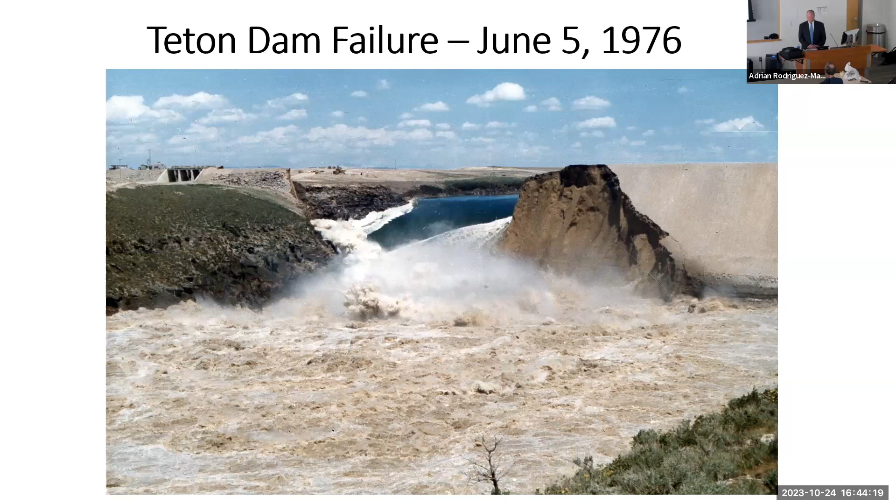I was asked in October '78, 45 years ago, by Rich Kramer, who was running the Embankment Dams Group at the time: 'We're opening up the dam safety office. Dave, we need some help. Would you take some time and volunteer and help?' And I said, sure, and I did so.

So I've been immersed with dam safety, dam engineering, and construction my entire career. It's fundamentally rooted in the Teton Dam failure.

I had the great fortune to be blessed with many engagements with Dr. Peck over my career. He served on several consulting boards for dams that I designed and constructed. This is his quote with respect to the failure at Teton. Frankly, if you have interest in the dam and levee world, I submit reading those proceedings from that investigation should be required reading. I'm sure you can find it online.

Again, I had good fortune to be involved, to talk to Dr. Peck and others who were involved with the failure. The state of the profession at that time truly should have dealt with the geologic conditions that presented themselves at Teton. There was truly a situation where the organization failed, quite frankly.

So before Teton, there was actually Fontenelle Dam on the Green River in Wyoming, western Wyoming. It's an earth dam, about 130 feet tall, 5,000 foot crest length, built in the 60s.

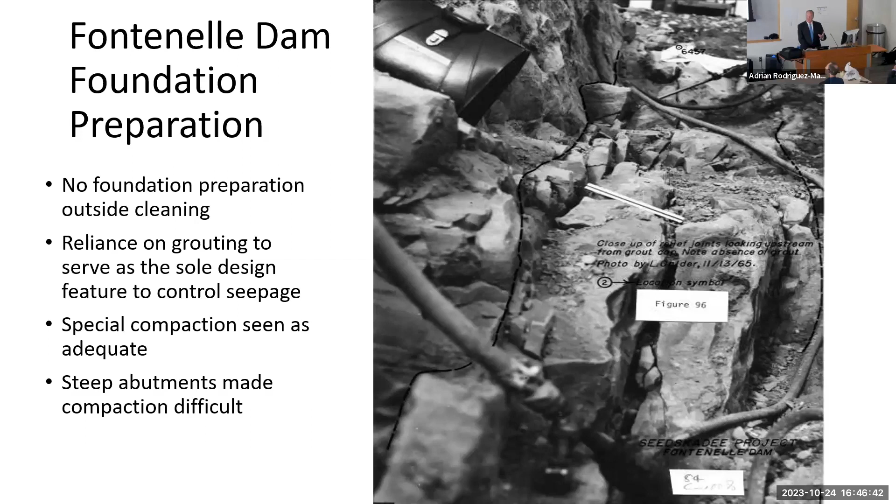So this is a picture of the foundation. There were vertical, open joints—very problematic geologic conditions upon which to build an embankment dam. You can see some of the open joints in the design. There was generally not a rigorous cleanup or treatment program, and the single line of defense to mitigate foundation seepage was foundation grouting. A fairly conservative section in terms of the impervious core, constructed out of silt and gravelly silt, similar to Teton.

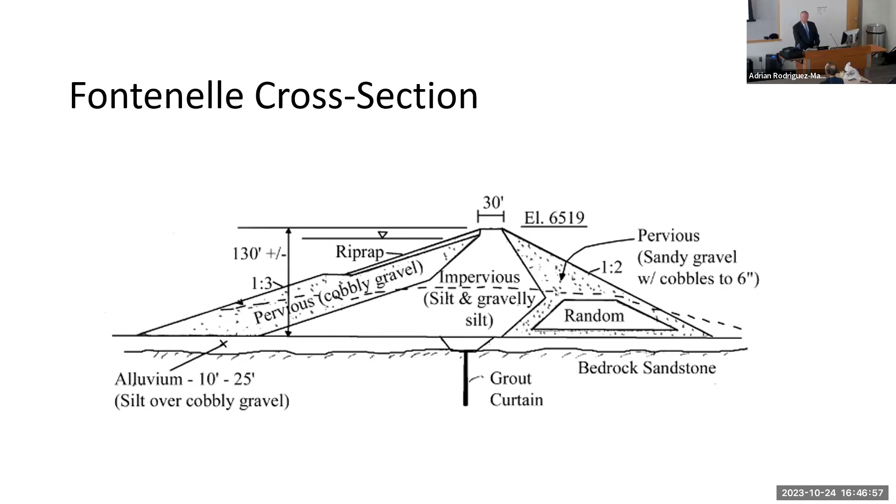But what really caused the incident or the concern is this: in May of '65, the spillway, constructed over on the right abutment, at the spillway embankment contact—again, some of the irregularities and open joints in the foundation—seepage migrated through, created erosion, and there was a near failure here. They were able to open the gates, lower the reservoir, and establish a safe condition.

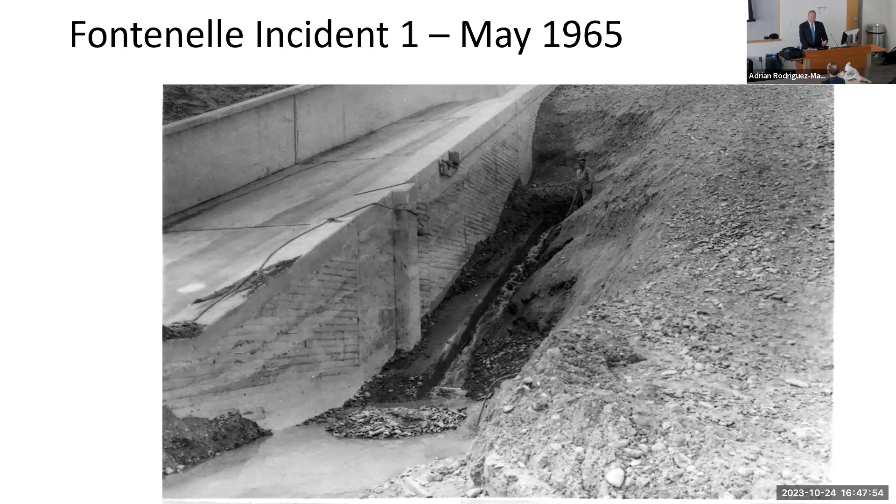They then excavated this, backfilled it, reconstructed, refilled the reservoir, and lo and behold, in July, a second event happened. You can see the extent of it in the same general area.

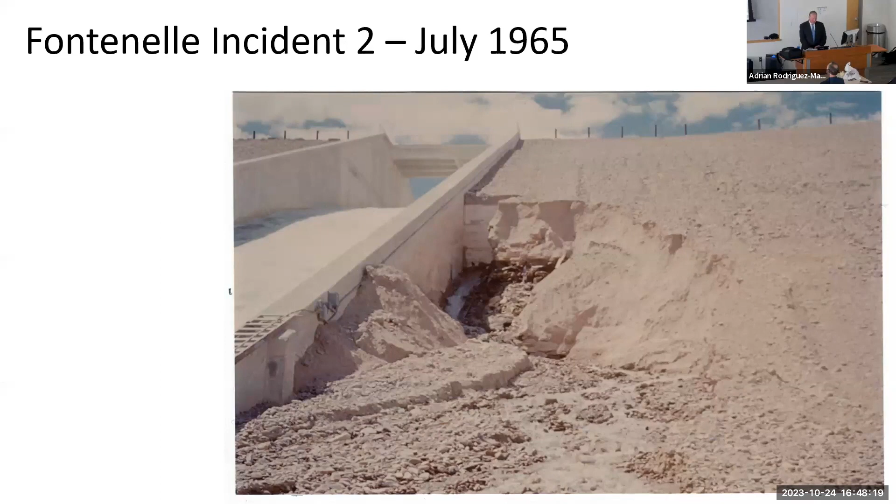So again, just a few months later, the same event happened again—emergency evacuation, lowered the pool, excavated this out, and rebuilt it, reestablished the reservoir pool. And lo and behold, a third incident occurred in September of '65, much larger in extent.

When I see these pictures, I am constantly amazed that the crest didn't fall in and the dam breach, causing release of the reservoir. Just a miracle that it didn't happen. So they excavated and rebuilt this section and reestablished the reservoir.

So I point this out in that if you work for large organizations, you shouldn't be complacent—you should guard against being complacent. The Bureau of Reclamation had built Hoover Dam, Glen Canyon, Grand Coulee Dam. So there was, in all honesty, some arrogance within the organization, having all of those grand dams in their portfolio, operating successfully around the West.

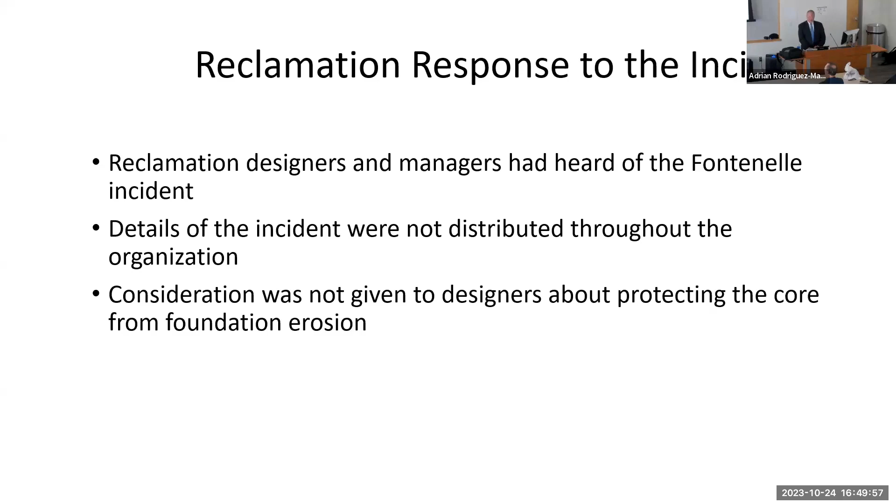In response to this incident, reclamation designers and managers heard about Fontenelle, but in talking to engineers working in that era, there was not widespread discussion, presentation, or conversation about its cause and extent. So this is truly before a formal dam safety program was designed and implemented.

So moving on—from Teton, 11 lives were lost. The dam essentially topped out and failed upon first filling. Again, the state of the profession, in all honesty, if you go back to that era, was mature and certainly had the experience and wherewithal to treat a difficult foundation. This was volcanic basalt, lots of open joints, but again, the organization did not really heed the state of the practice, and lo and behold, the dam failed on first fill.

So again, some of the lessons learned: the principal designer for the dam in Denver visited the site one time during construction. One time. There was essentially little to no coordination or communication between the construction team building the dam and the design team that designed it in the Denver office.

There was no external review, no consultant boards at that time. And again, the primary defense against seepage through foundation defects, which were significant at this site, was essentially relying on a single line grout curtain.

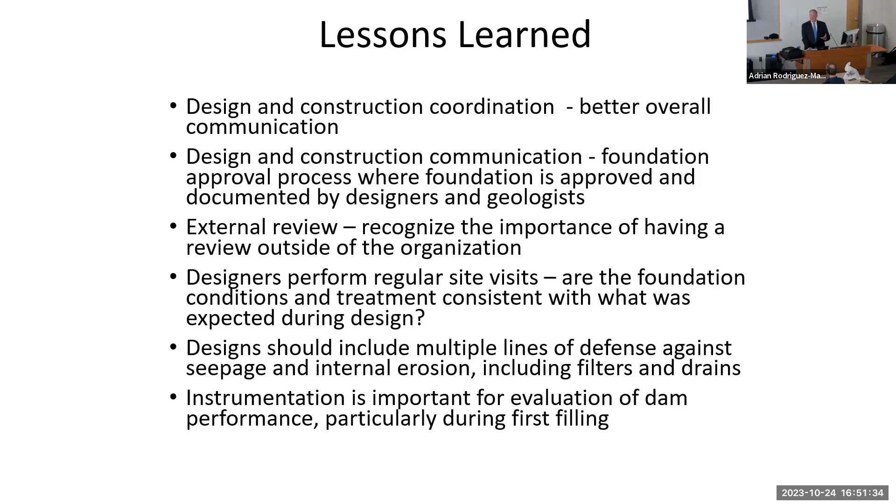So moving on to the history as it relates to dams as a significant piece of our infrastructure in this country—where there's dams, there's dam failures. So I'll talk here in a minute about the NID, the National Inventory of Dams.

So in the United States of America, there are 90,500 dams in the NID, which I continue to find an astounding number of dams that have been built and are registered in the NID, administered by the Corps of Engineers. You can see with the NID, the federal government—Corps of Engineers, Bureau of Reclamation, TVA—has been able to keep track of failures or incidents which have generated these statistics.

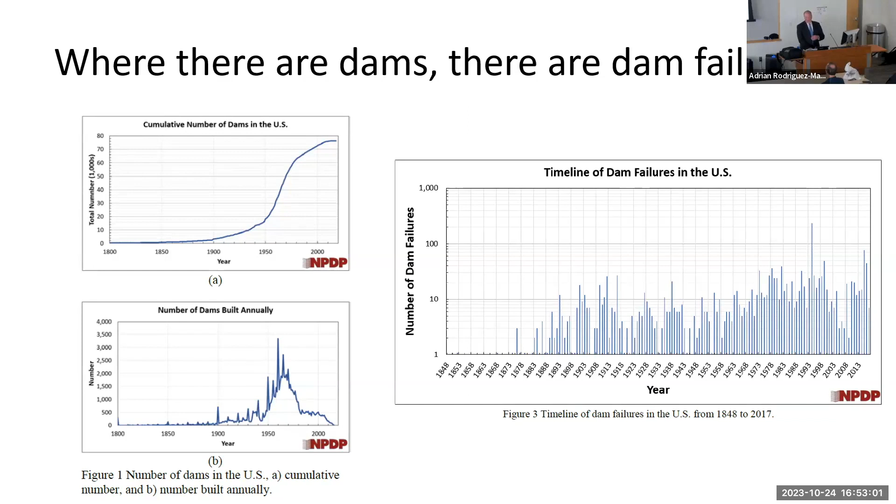So there's low probability, but nonetheless, when you impound water and create a lot of potential energy, if you don't treat the foundation or design it properly, you certainly can have a breach and release a lot of energy.

I apologize, I know this is a bit of a hard slide to digest, but it's a timeline, and the intent here is to document some significant failures in the United States. There's Baldwin Hills, Fort Peck Dam Slide, Teton, Lower San Fernando. So in our last 50 to 70 years, there have been some very significant dam incidents or failures that have actually caused the reservoir to be released and caused significant damages and loss of life downstream.

Certainly the Teton Dam failure in 1976 generated the impetus within Congress and the federal agencies to generate legislation and create a national dam safety program.

Another slide depicting this. So ironically, at this time, the Corps, the Bureau, and TVA in the federal world were self-regulated dam owners, with their own portfolio of dams. The Corps has 715, TVA has around 200, and the Bureau has around 400 dams. When you sum those numbers and compare them to 90,500, you can appreciate that it's maybe not a high percentage, but nonetheless those agencies have some very high and very significant dams.

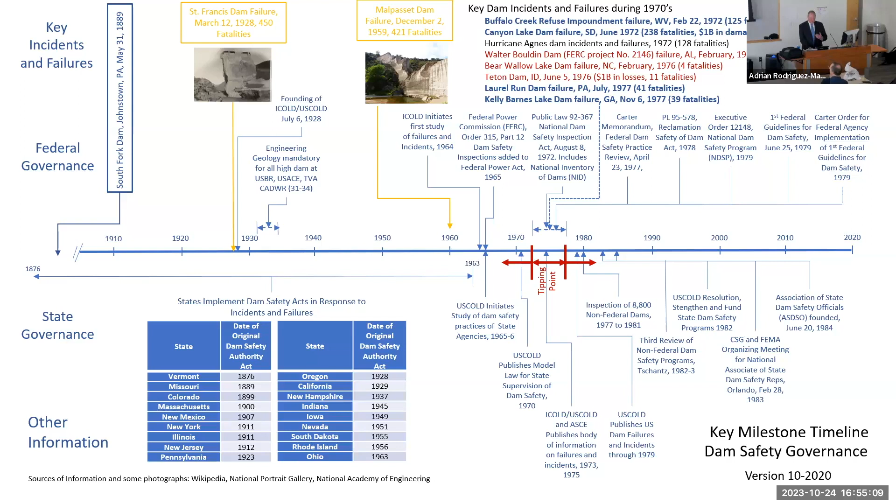So again, the turning point for the dam safety program in the United States was certainly Teton, the impetus in '76. As a result, the Dam Safety Act was developed and passed.

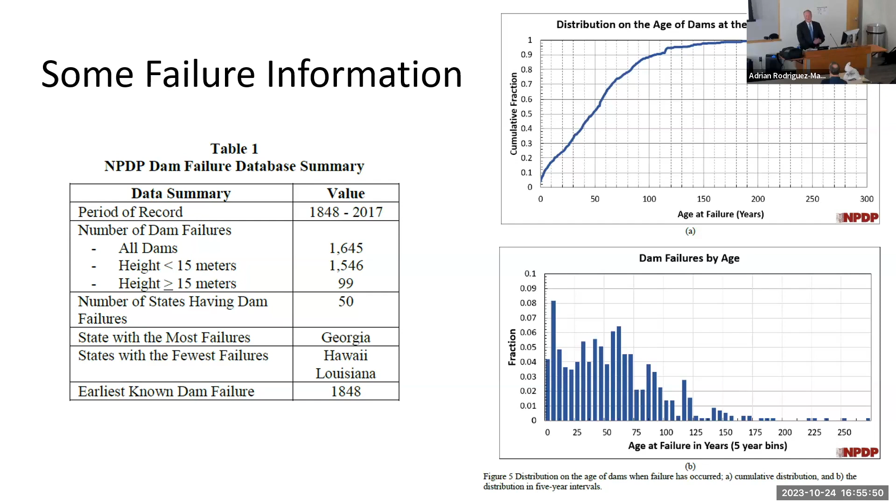So some other failure information to give you context. This record is from 1848 to 2017. You can see the number of dam failures is over 1,500. All 50 states had a dam that failed. The state with the most is Georgia. Those states with the fewest were Hawaii and Louisiana. Having this sort of statistical information is quite important in terms of developing dam safety programs.

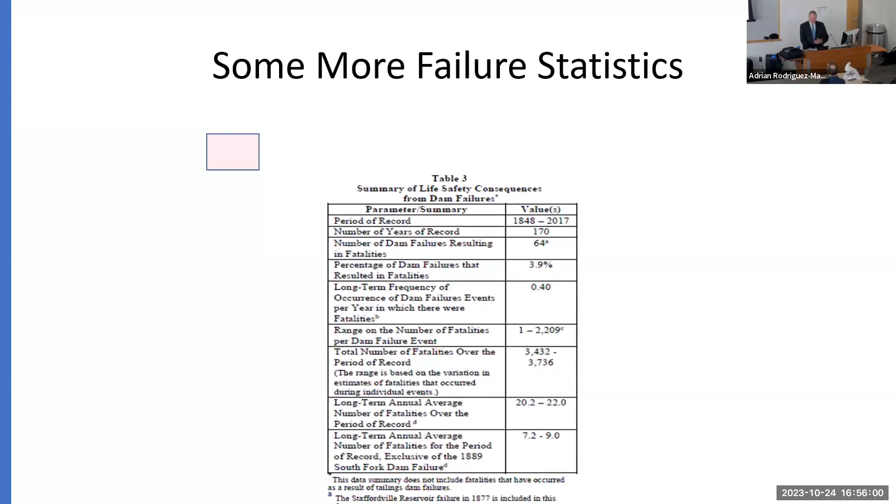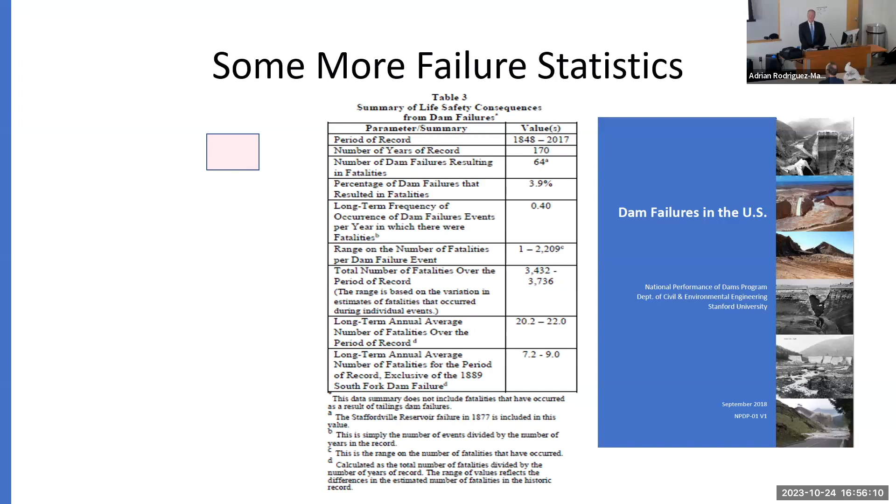Some other statistics came out from Stanford University in 2018, represented in this report. I'd certainly encourage you to reach out and access that information.

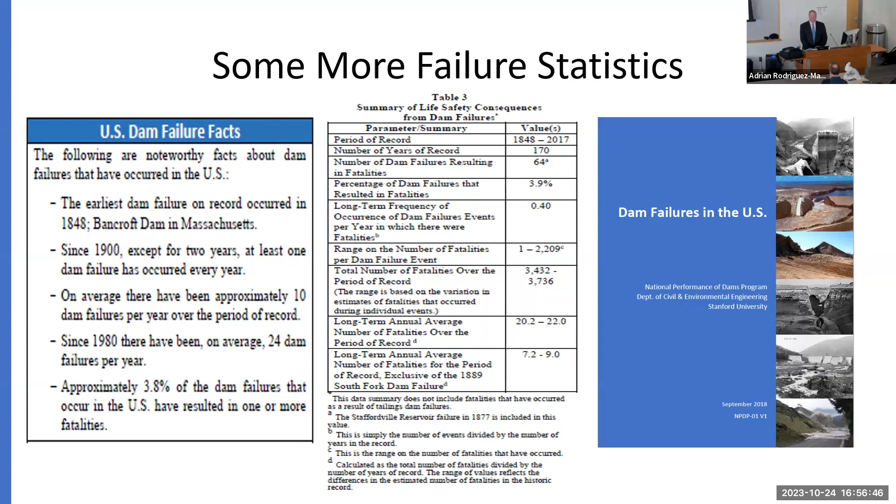A statistic I find astounding is that since 1980, so in the last 43 years, there's been essentially 24 dam incidents per year. That doesn't mean failure, but there have been slides or stability issues that cause some sort of emergency action. So it's essentially 2 a month for the last 43 years, which again I find rather astounding.

So as I said, the National Inventory of Dams was created, mandated by Congress as part of the dam safety legislation. This is the URL for that. The Corps maintains this database, and it interacts with each of the 50 states. Each of the 50 states now has a legislated active dam safety program. Alabama was the last - last year, or maybe the year before, they finally passed legislation and funded and started a dam safety program. That conglomeration of all 50 states resides under the Association of State Dam Safety Officials, ASDSO.

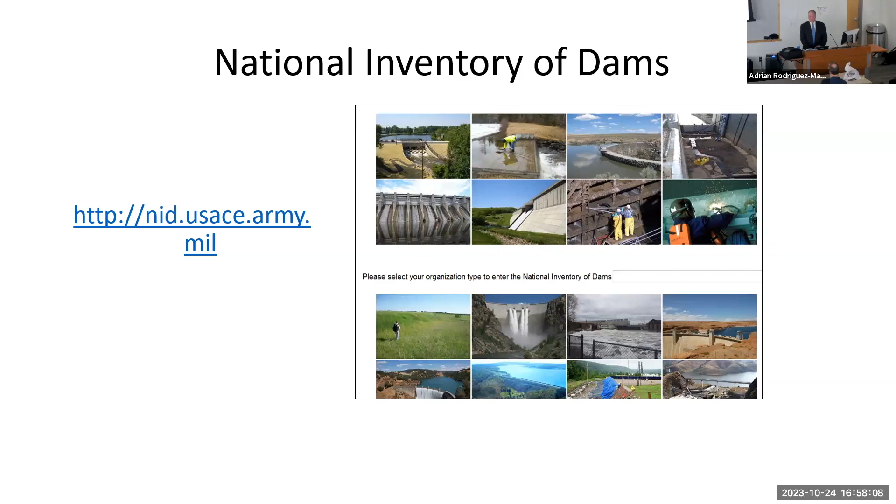The other organization primarily focused on dams in the U.S. is the United States Society on Dams, USSD, which is affiliated with ICOLD, the International Commission on Large Dams. Both USSD and ASDSO meet annually. As Alan mentioned, as you move into practice or proceed in your career, you should certainly reach out and engage with those organizations.

So some statistics from NID. It's used by the National Dam Safety Review Board and Association of State Dam Safety Officials to inform legislatures in their states, to inform Congress and federal agencies, and to recommend dam safety policies. Many of those changes reside in WRDA legislation, the Water Resources Development Act. They're not passed every year, but every couple of years WRDA passes through Congress, changing policies or adding new ones.

So more than 65% of the dams in the NID are classified as low hazard. 50% of them are less than 25 feet in height. And almost 70% of the dams are privately owned. The privately owned dams are regulated by the state dam safety programs. The average age of the dams is 60 plus years.

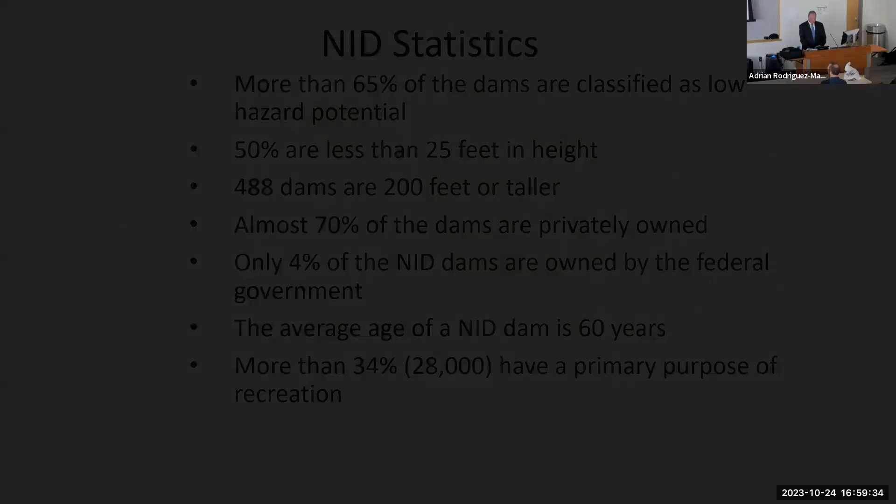They designed and are responsible for 15,000 miles of levees, about 10% of the total. Those of you who grew up or lived around major rivers like the Mississippi, Missouri, or Ohio can probably remember significant flood hydrologic events in your lifetime that caused flooding.

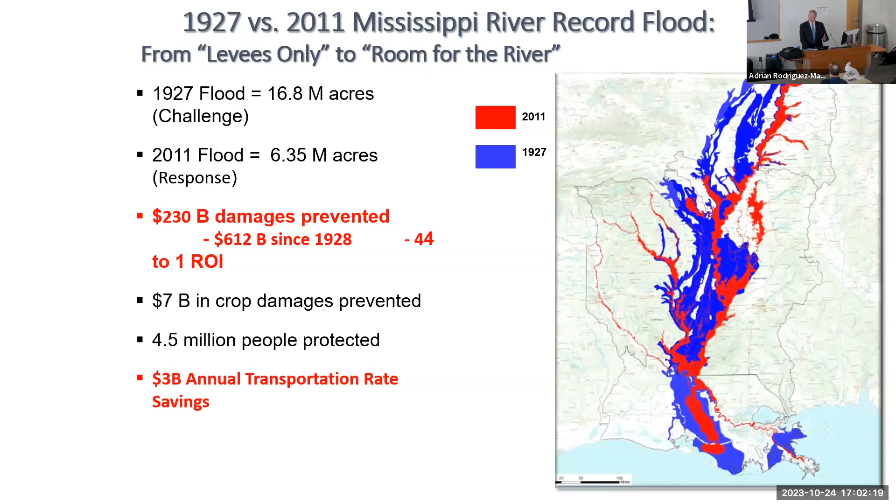You can see between '27 and 2011 there were almost 17 million acres affected by flooding in '27, and somewhere over 6 million acres in the 2011 floods. The amount of damages that were mitigated or eliminated by the levees is again very significant.

Congress passed the National Levee Safety Act in 2007, as part of WRRDA legislation in 2014. The Corps of Engineers is taking the lead to implement the National Levee Safety Program. Again, the Corps is responsible for 15,000 miles of levees, and they are working with each of the 50 states. The goal is to bolt a levee safety program onto the existing dam safety programs within the states.

So similar to the NID, the Corps has created the National Levee Database. In the last decade, they have been able to assess and populate the levee database for the 15,000 miles of levees in the country that the Corps is responsible for. They're working with states and other private owners to assess their systems and get that information into the database.

As I know you can appreciate, having this sort of historical information is the foundation for any safety program, and it's quite important as organizations continue to assess the performance of their structures and make decisions as to whether they're safe or unsafe, and if unsafe, what actions are required to bring them to acceptable levels of failure, as I'll get into in a minute.

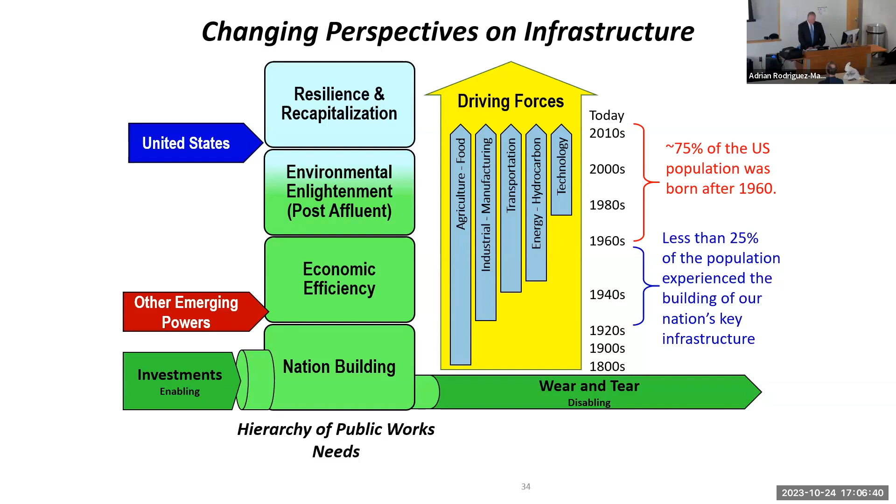So again, I find those kinds of statistics rather fascinating, but again, try to give credit to the previous generations.

Transitioning from the traditional view of infrastructure safety, it was generally fundamental engineering: strength of materials, geologic characterization, laboratory testing to identify engineering properties of materials, and from there utilizing existing materials to design dams or levees and construct them with stable slopes such that they could handle the hydrologic and seismic loads without failure.

And these were, and still are, standards based. So you're certainly experiencing all of those factors, all of those areas as you continue and progress through your education.

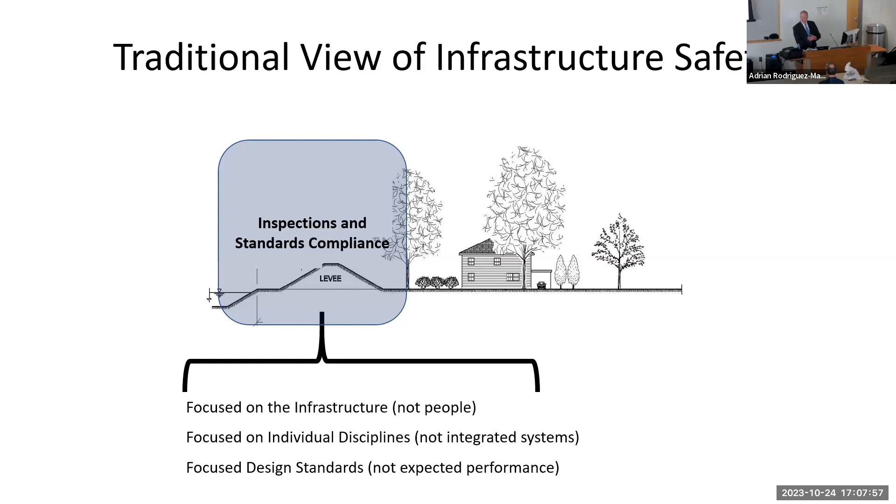In the last 30 years, at least in the federal world, and it's slowly transitioning from federal to states and other private owners, we're transitioning to a risk-informed view of the infrastructure. In that context, you'll hear the word risk in just about every sentence. Fundamentally, it's a function of the hazard, the loading, response to that loading, and evaluating the consequences.

In the early days of dam safety, when I was working at the Bureau of Rec, I think we did a good job of evaluating the potential failure modes. We might not have used that particular term, but we certainly identified the geologic conditions, evaluated strengths of materials, and decided whether we needed a cutoff wall or whether we needed to grout the foundation or do some other special means of foundation treatment.

And we stood on the crest of the dam and said, well, there's a lot of people down there. But we didn't really exert the analysis to categorize and assimilate that information as part of our decision making. It was not really a formal part of that.

As we transferred into this risk-informed decision-making process, which is the guiding principle for our safety programs, we spend a lot of time and rigor to evaluate the loading conditions, assess how the dam or levee would perform under those loading conditions, and we've put a lot more rigor in assessing the potential consequences.

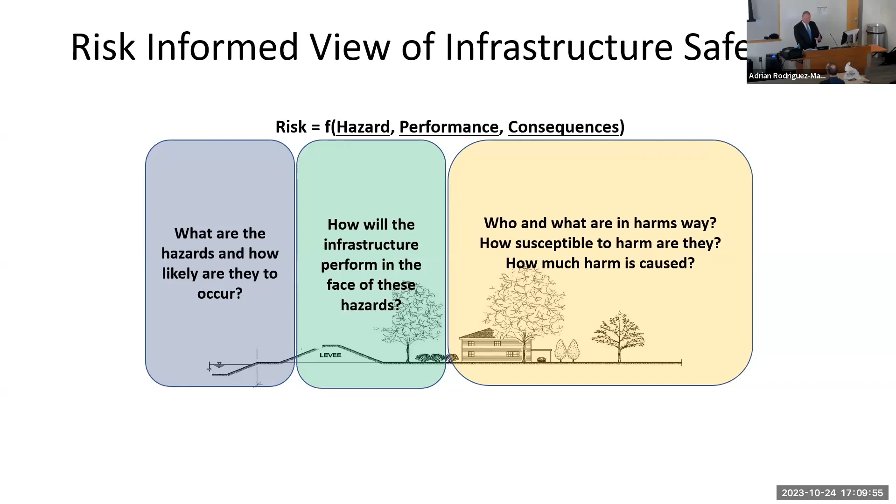It has been well served in coordinating within the federal community and community of dam owners, but it's also been very powerful in communicating with our legislatures in each state as well as Congress in terms of defining the condition of our infrastructure. As I said, average age of dams is 60 plus years.

There's over 600,000 bridges in the United States, 150,000 miles of levees, untold numbers of roads and pavement and that sort of thing. So the extent of our infrastructure that we all benefit from is truly amazing when you consider most of it's been built in the last 100 years of our country.

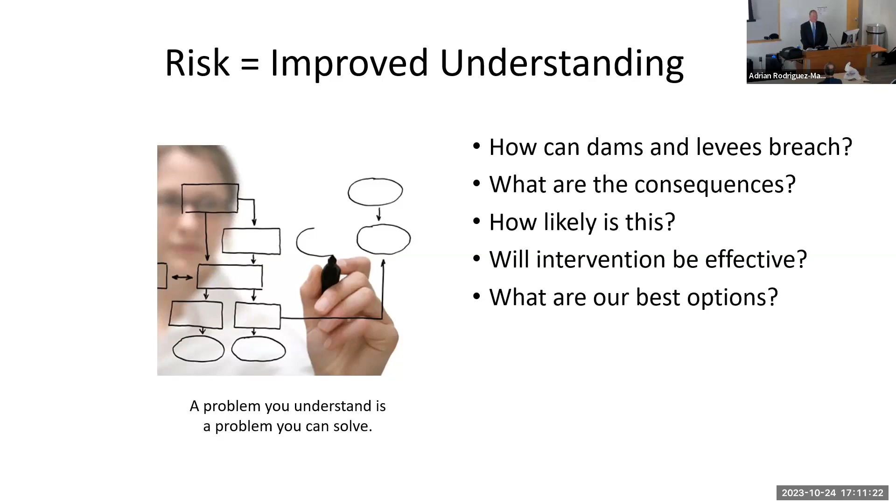Being able to articulate to the legislatures and to Congress about our needs as agencies like the Corps, the Bureau, TVA—we have this infrastructure, it's in this condition, we need these kinds of monies appropriated so that we can go forth and execute modifications or repairs to these structures to maintain their serviceability.

Since the 80s, dam construction has slowed with the implementation of environmental regulations. It's certainly more challenging to move forward and modify structures given those regulations.

I've had the great fortune of working on the last two major dams built in the United States: Ridges Basin Dam for the Bureau outside of Durango, Colorado, and the Corps-constructed Portuguese Dam, an RCC dam outside of Ponce, Puerto Rico. I've been blessed to work on a significant number of dams around the country and around the world, and I've also been able to modify and work on several.

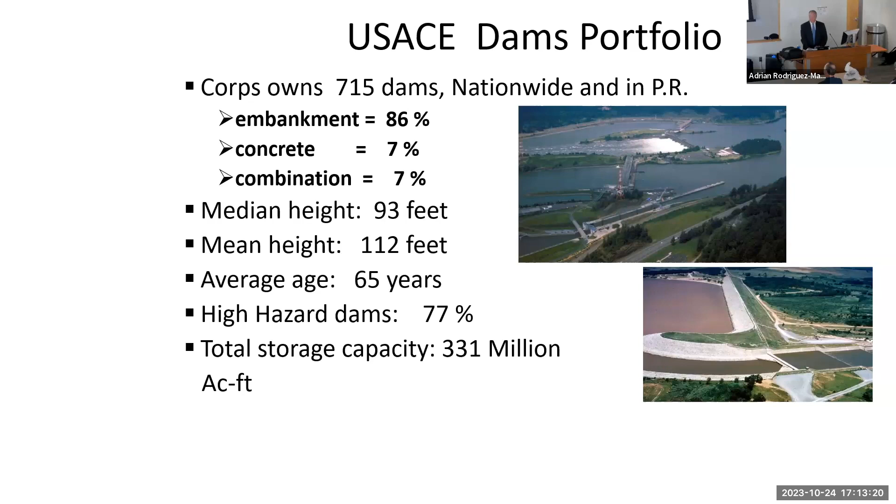Having ended my career with the Corps, I have quite a few statistics primarily focused on the Corps. The Corps' portfolio has 715 dams, and almost 90%, 86%, are embankment dams. The median height is around 93 feet, and the average age is 65 years or so.

Over the last decade, as the Corps transitioned to risk-informed decision-making, they have assessed each of their structures. You'll see this chart—this is an FN chart. The axis is annual probability of failure versus life loss. So dots that plot above the line are pieces of infrastructure—dams, levees, locks—that have high risk.

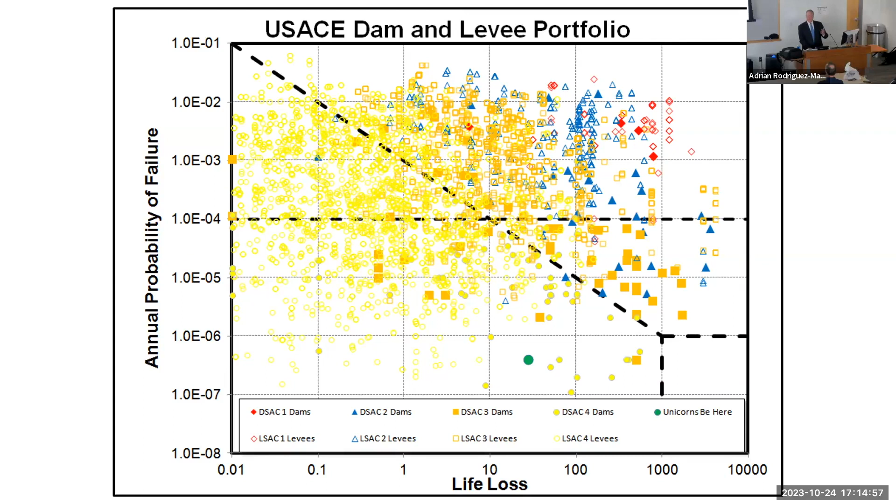They've been assessed. Failure modes have been developed and evaluated and judged by a multidisciplinary engineering team that the dam needs to be modified or the levee needs to be modified to obtain or maintain safe operation. Almost half of the 3,000 pieces of infrastructure that the Corps maintains and operates on behalf of the country is judged to be high risk and needs to be modified.

In addition to dams and levees, the Corps operates about 240 lock structures on the major river systems in the country.

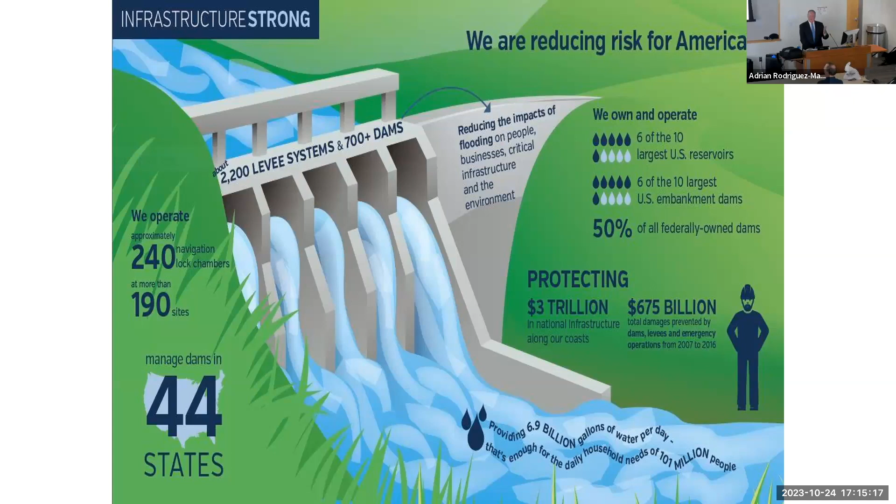And again, representing a value of $3 trillion. So again, a tremendous portfolio of infrastructure.

As the Corps has transitioned, they would tell you that it's not necessarily that the structure is 65 years old. It's because the major risk drivers identified are defects or flaws in the design, and the state of practice and material technologies have changed. Concrete is air-entrained now with many additives, so the durability of concrete is much better than it was back in the 20s or 30s.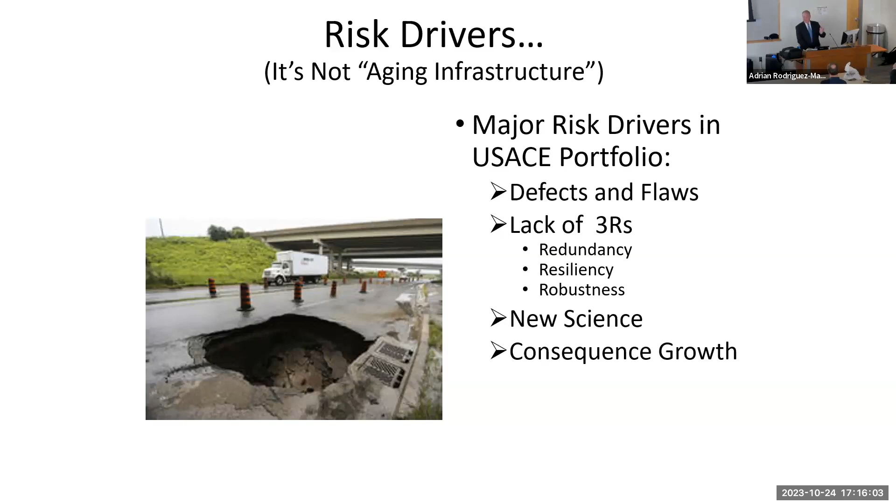But as you can appreciate, the country's population has increased dramatically in the last 100 years. Last census, we're somewhere around 330 million people in this country. So the amount of consequences, the property and development, houses, people living behind dams or levees has grown exponentially, thereby creating the risk.

So fundamentally, risk-informed methodology allows organizations such as the Bureau or the Corps to be able to rack and stack. If you own 3,000 pieces of infrastructure, how do you decide what to work on first? Risk has been very powerful in being able to assimilate and evaluate the portfolio of infrastructure and decide this is number one priority and this is number 3,000 priority.

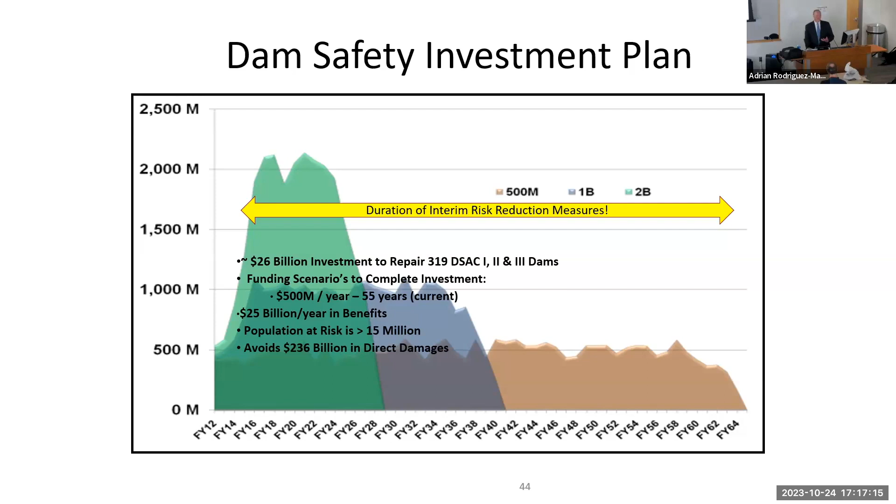And then again, it's very powerful in working and coordinating with legislatures and Congress to be able to tell that story in a compelling and persuasive manner, such that you can solicit and obtain the funding so you can go forth and maintain these structures.

So again, the Corps has spent a considerable amount of effort, money, and labor hours to develop databases and be able to continue to track the condition of the infrastructure. As I said, having these sorts of statistics and this sort of information, we've been able to tell a very powerful and compelling message to the legislature.

So you're able to tell where the source of risk is, and then through engineering, you're able to identify those engineering solutions that you're asking money for to go forth.

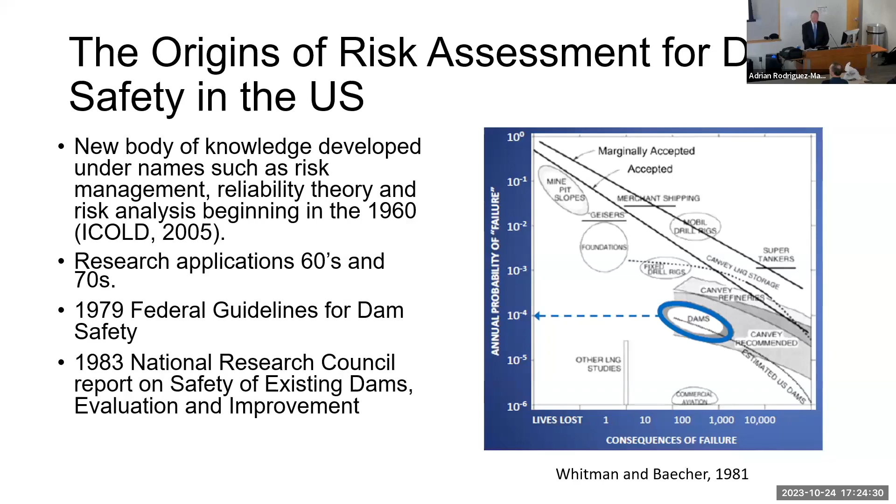In 1979, federal guidelines and the 1983 Research Council was the pioneering aspect for the federal agencies. In the Dam Safety Act of '78, '79, there was specific language written that focused the agencies to start thinking in terms of risk and failure modes. A lot of this has its root in the space world, NASA.

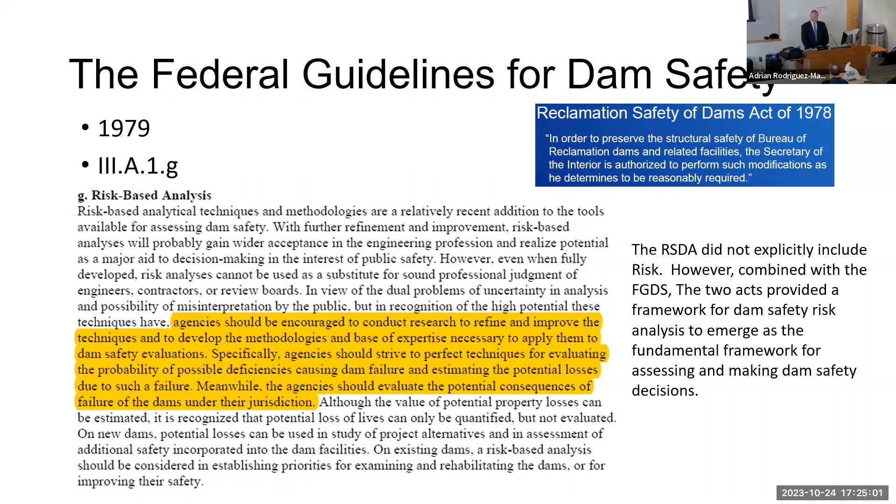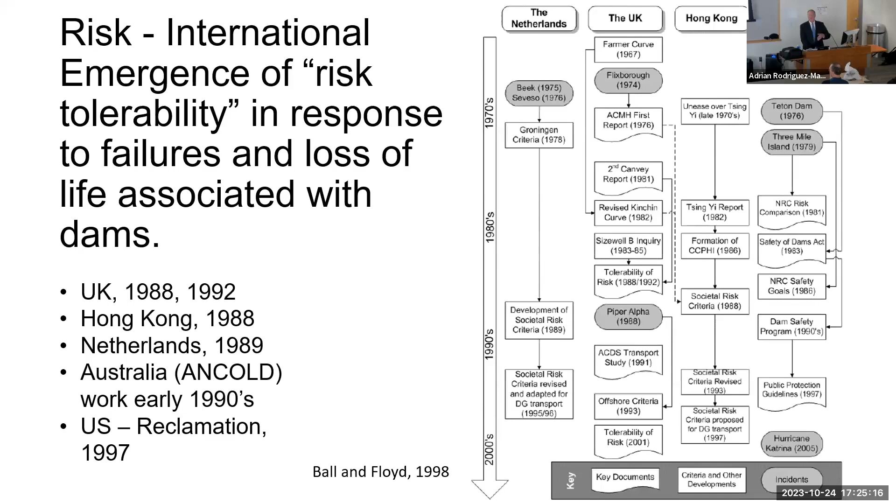As you can see, other countries - in Britain, Hong Kong, and particularly in Australia - also began developing the methodologies and processes that we continue to utilize. In the late 70s, transitioning through the 80s and 90s, Reclamation probably led other federal agencies in developing risk-informed decision-making.

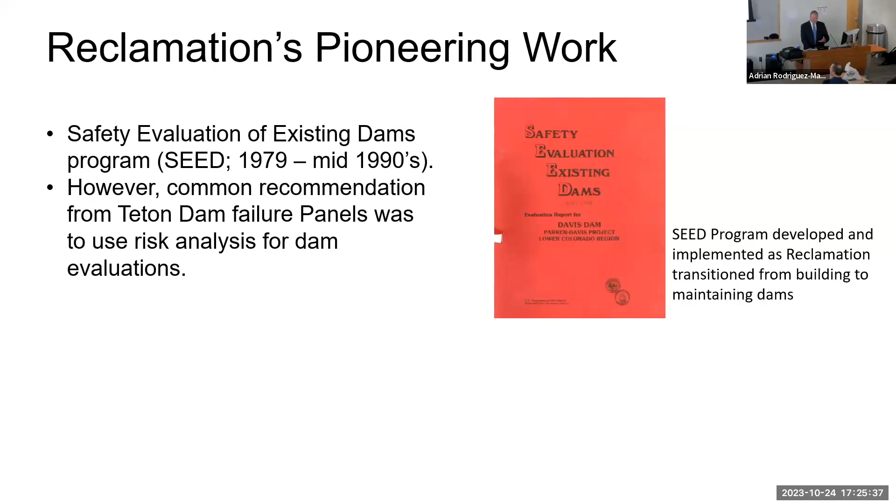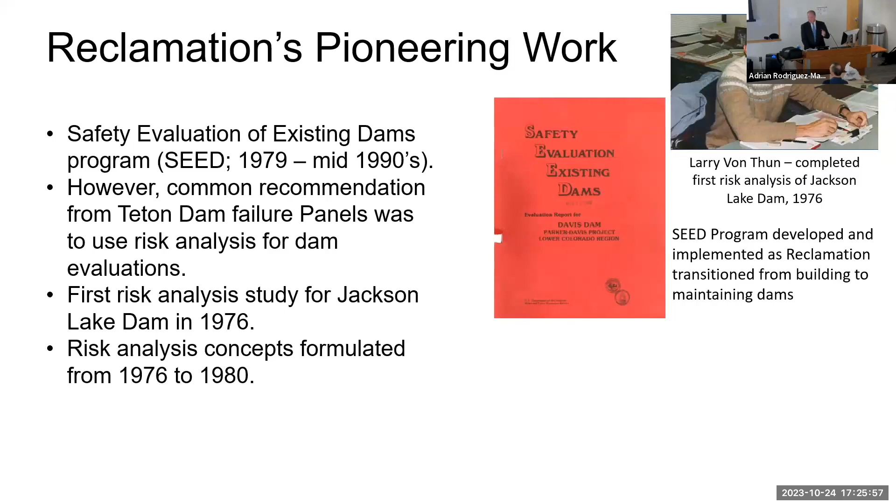The first study was done for Jackson Lake Dam in 1976 and was led by Larry Von Thun, who really pioneered the development of risk analysis along with Dr. John Smart at the Bureau. A team was formed and they developed the first guidelines, if you will. Larry worked with the Canadian hydros, BC Hydro in particular, and began developing the processes where we evaluated the structures, developed failure modes, and went through a methodology to evaluate whether a dam could fail and started assessing probabilities of a potential failure mode.

Parallel to that, we also put a lot of rigor into upgrading and reevaluating the hydrologic floods and the seismic earthquake loadings, and certainly there was a lot more rigor put into evaluating consequences.

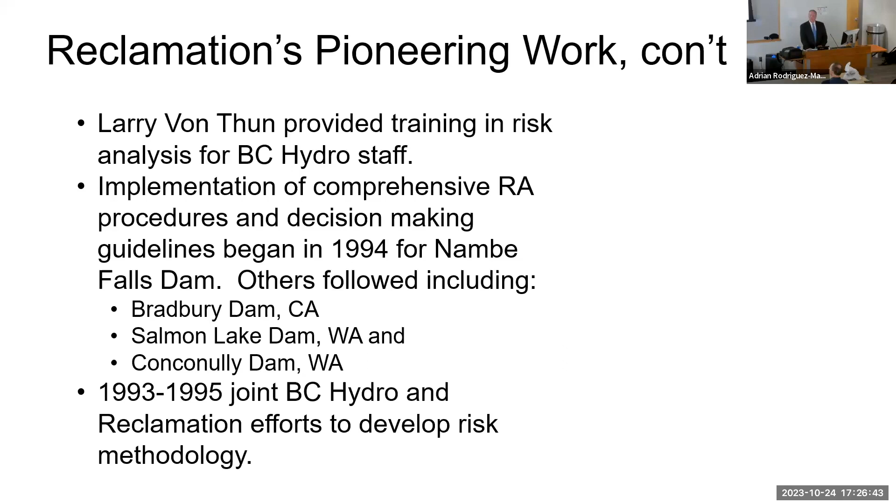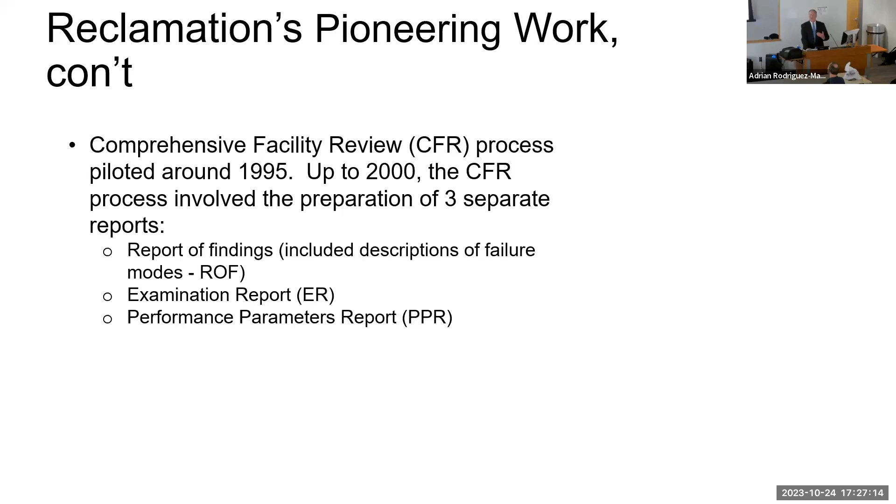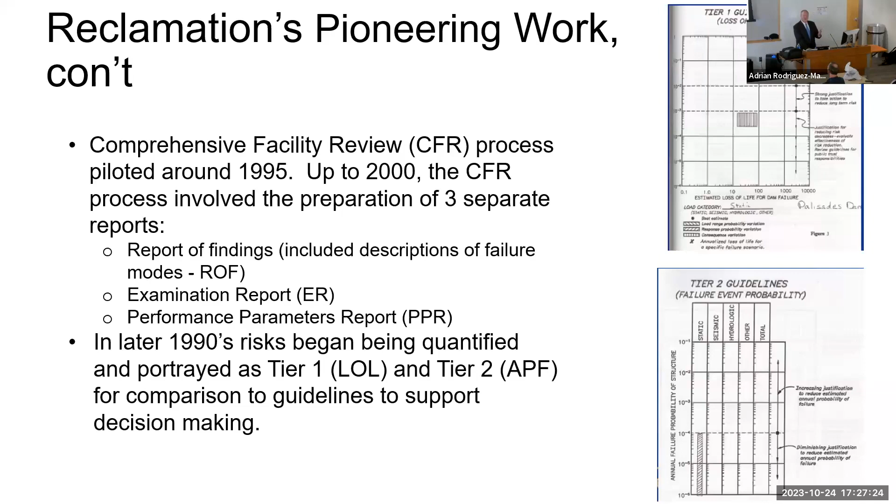The Bureau has been through their inventory of 400 structures in the last 40 years - they've been through it 4 and 5 times. Essentially, they have fixed their highest risk structures in those 40 years, but they continue to monitor them through the instrumentation and through their inspection program, continually reevaluating failure modes, loading conditions, consequences, and continually updating the risk assessment, or the risk category.

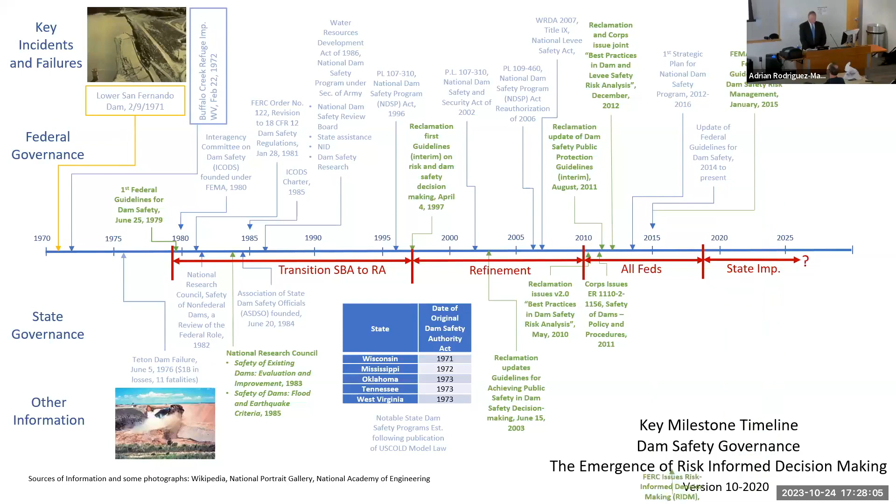Moving forward, trying to apply to the timeline, you're transitioning from the 70s through the 80s to the current. Now if you're involved in the business, certainly the states are becoming very active. I'm pressed for time a bit - this is a busy slide, so I apologize, but it tries to summarize the various milestones along the timeline. So trying to move forward a bit.

So to give you a bit of context, what is dam safety risk?

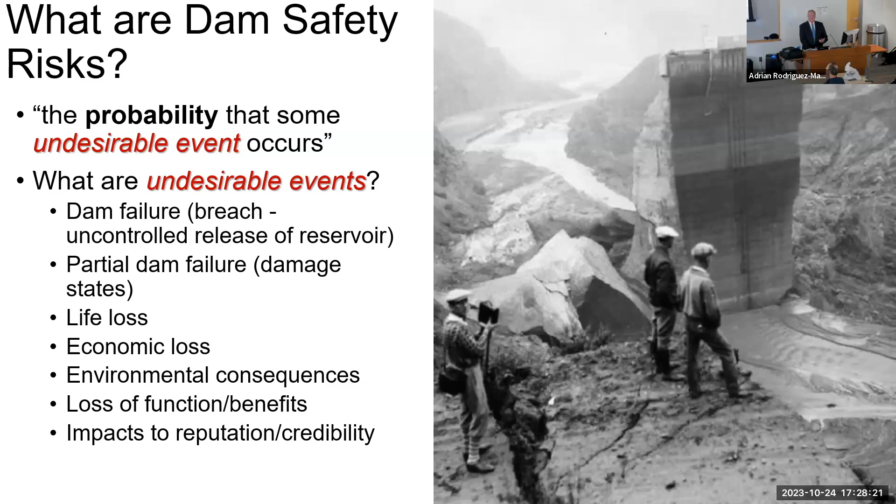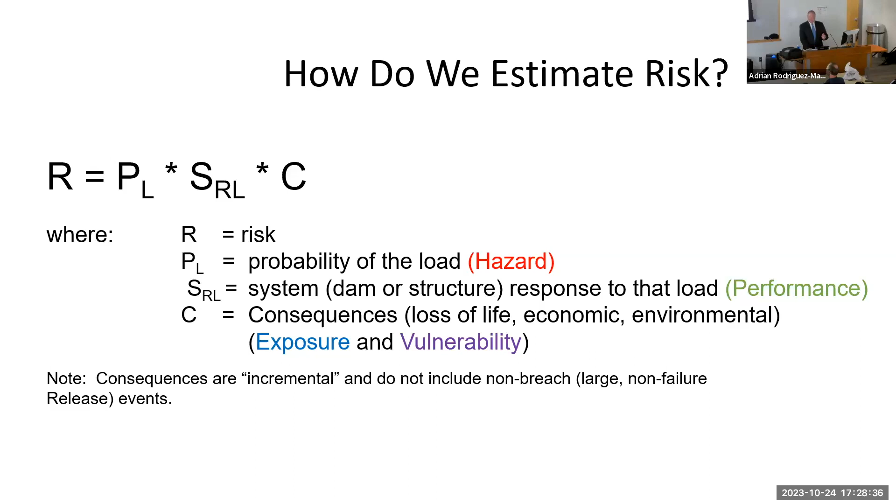So it's simply the probability of some undesirable event occurring that would generate serious economic consequences or life loss downstream. I said we wouldn't have formulas, but here's the risk formula: the probability of the loading, evaluating the probability of the response of the structure to that loading, multiplied by the consequences.

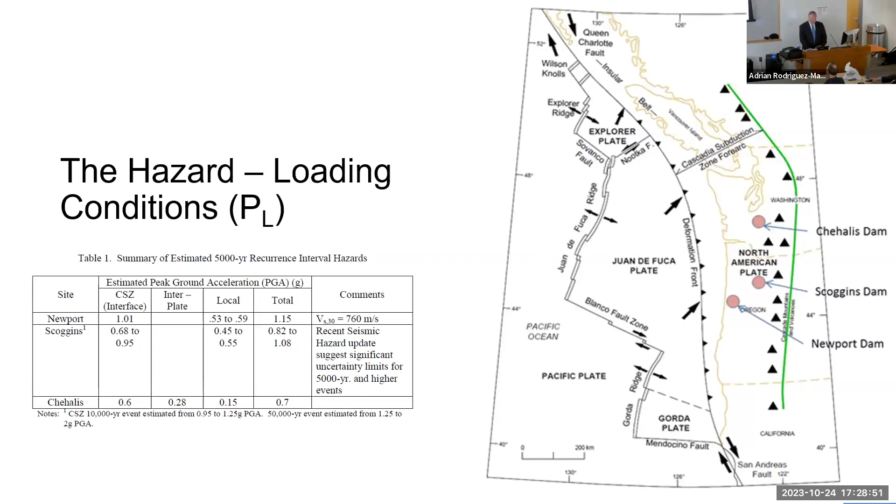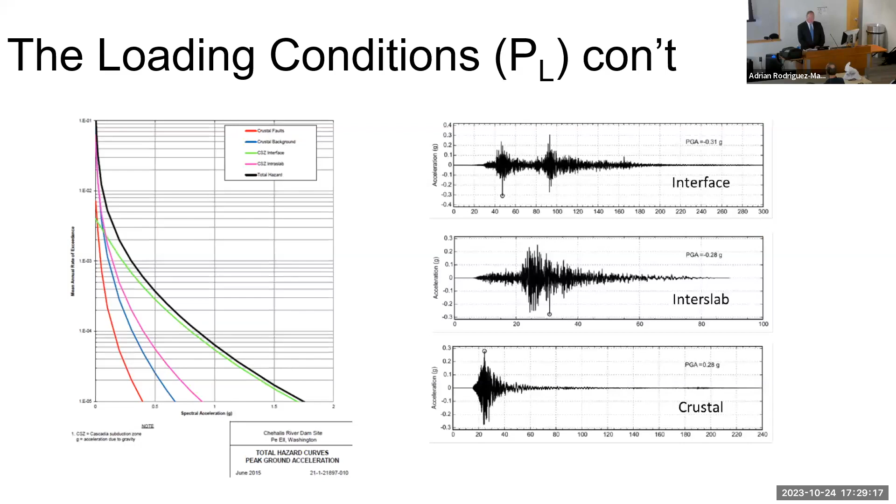As I said, there's a considerable amount of energy within the federal world and in academia around the country to evaluate the loading conditions. Those of you in hydraulic engineering know there's considerable ongoing effort at this university with seismic research and evaluations, trying to better understand what those loads are and how structures would respond.

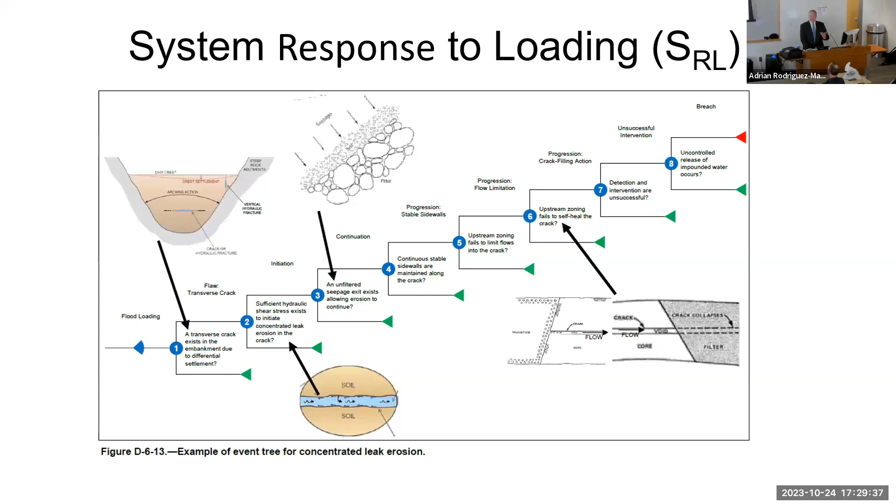This is a typical event tree. There's typically 8 nodes to a typical event tree, from whether there's a flaw and what the loading is, then stepping through whether that would create a failure of the structure and release of the reservoir.

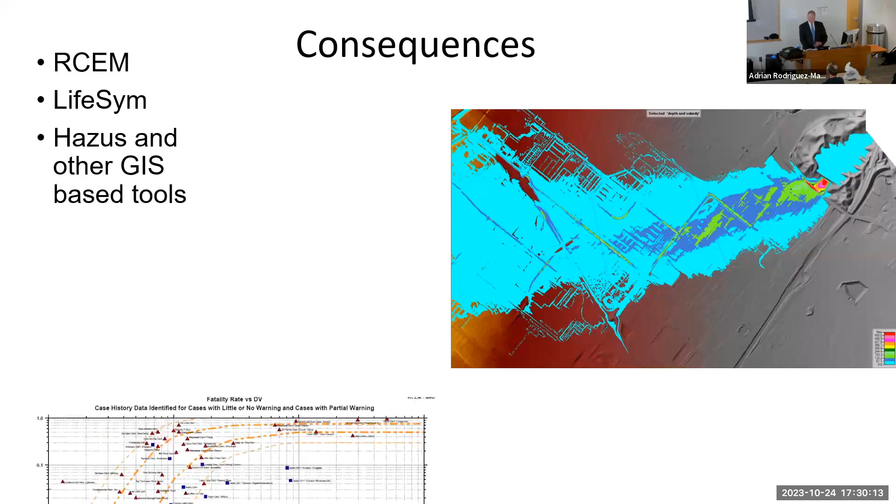Several software programs have been developed, LifeSim and others, continually being developed and upgraded to evaluate the consequences. With today's GIS technology, we can truly look at limits of inundation from a breach and quickly assess population at risk and potential life loss. The rigor and ability with today's technology to do that is just amazing.

And with that, there's always uncertainty. So we're definitely always trying to assess, if we make a risk evaluation, how certain are we? What are the bands of uncertainty? And certainly we factor that into decision making.

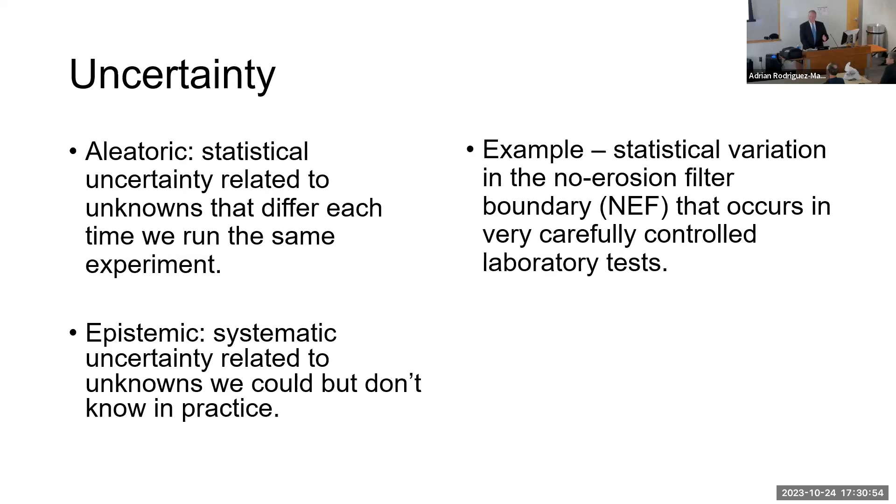There's aleatoric, or statistical, uncertainty. An example might be statistical variation in a filter boundary that you can evaluate from controlled laboratory tests. Epistemic uncertainty is when you didn't know about something, which creates its own level of uncertainty. Those sorts of things are included in a risk assessment.

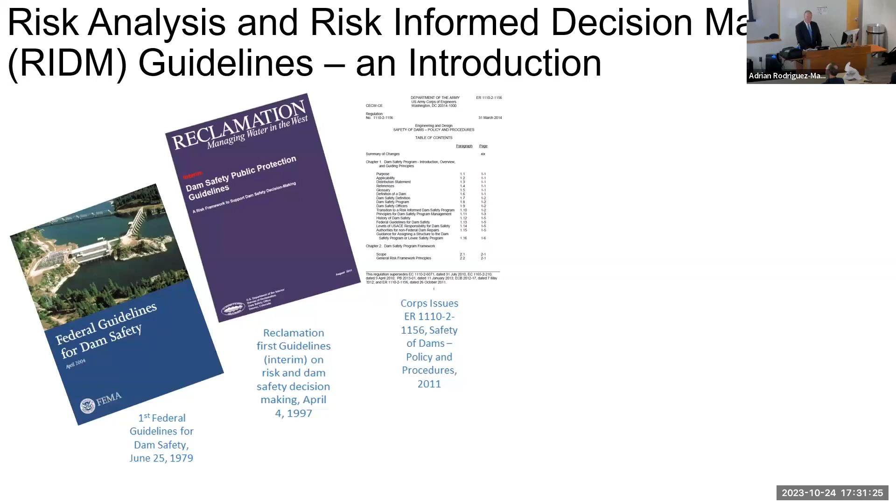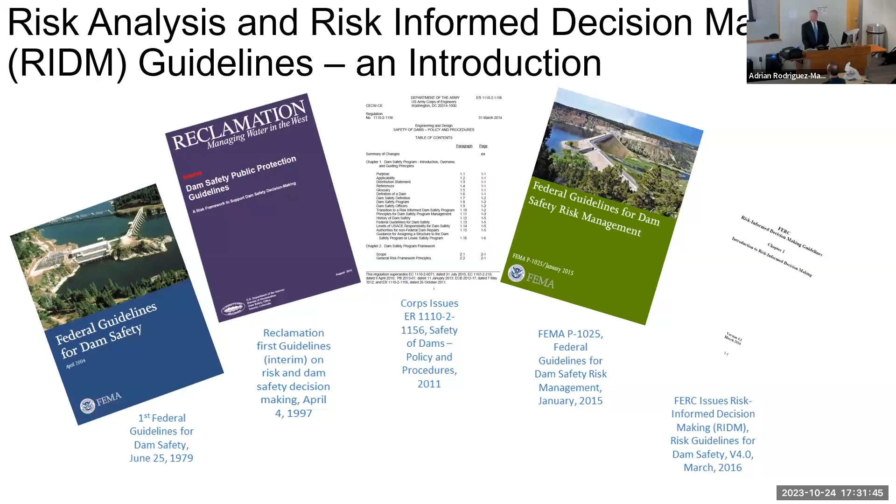There have been numerous guidelines developed. The federal guidelines for dam safety were put out in '79 as part of the legislation. The Bureau's first public protection guidelines came out in '97. The Corps published their dam safety guidelines in 2011. Then all the federal agencies put out the federal guidelines in '15. Most recently, FERC, the Federal Energy Regulatory Commission, has issued their own risk guidelines, similar to the Corps and the Bureau. They regulate about 2,200 dams in the country.

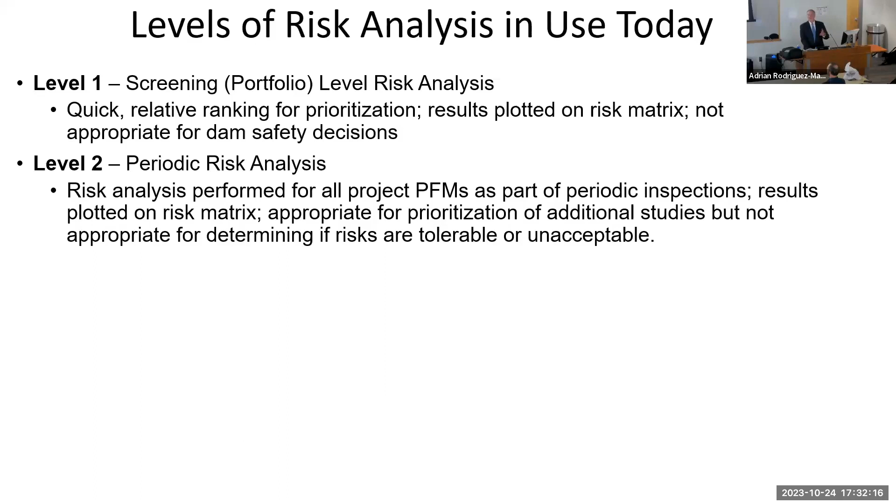As you can appreciate, there are various levels of risk analysis, from a screening level to a moderate to a very thorough and complex one, depending on what sort of decision you need to make. The more rigor that goes into it with more information allows for a very robust evaluation and solid information for decision makers to figure out what structure needs to be worked on first.

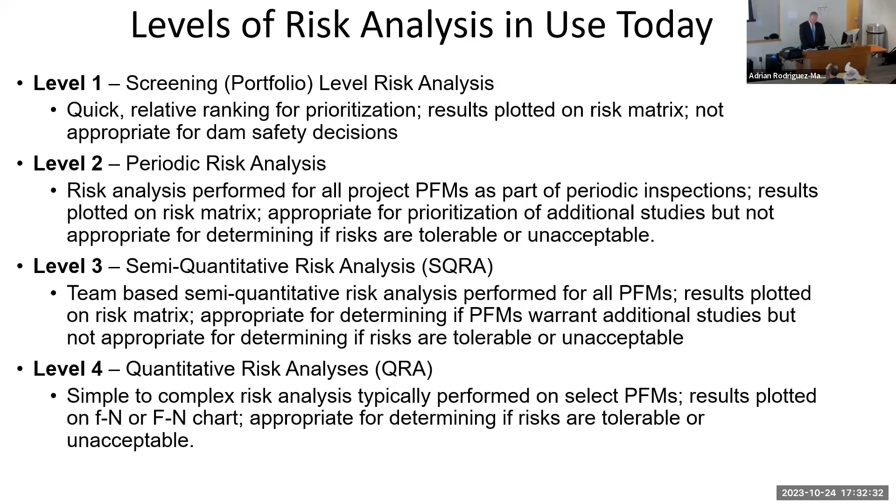This summarizes those 4 levels. Level 1 being the simplest, the screening risk analysis. Level 4 being the most rigorous.

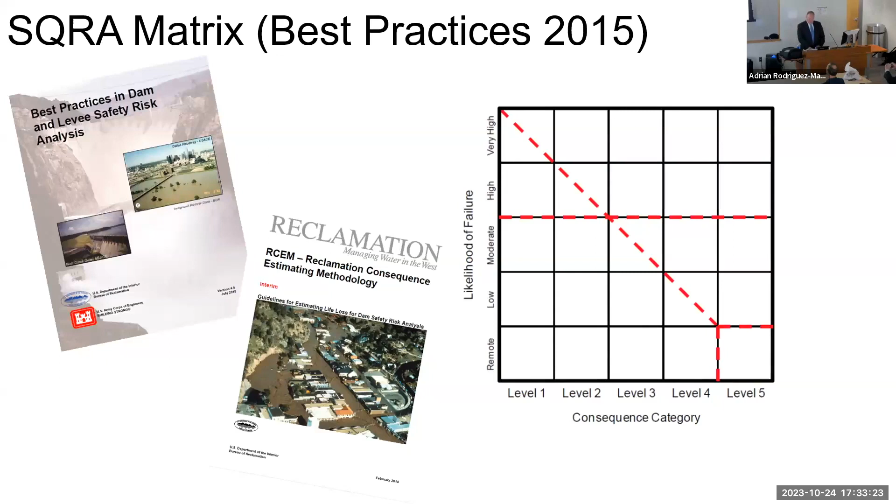The Corps and the Bureau have collaborated and developed a best practices training course. It's 40 hours, given at various locations around the country, transitioning that to USSD to broaden the exposure of that training to the profession.

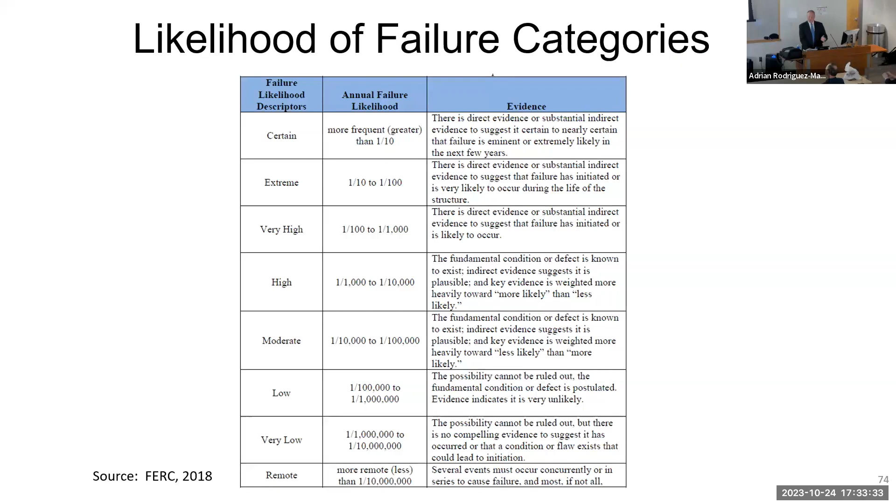This is from FERC, showing the different levels of failure categories you might use as a guide when making your evaluations. These are several categories used in assessing life safety as well as economics.

Again, the screening level is the simplest, may take a day or several days. A moderate one might take 40 hours, and something like a level 4 may take several months and several million dollars.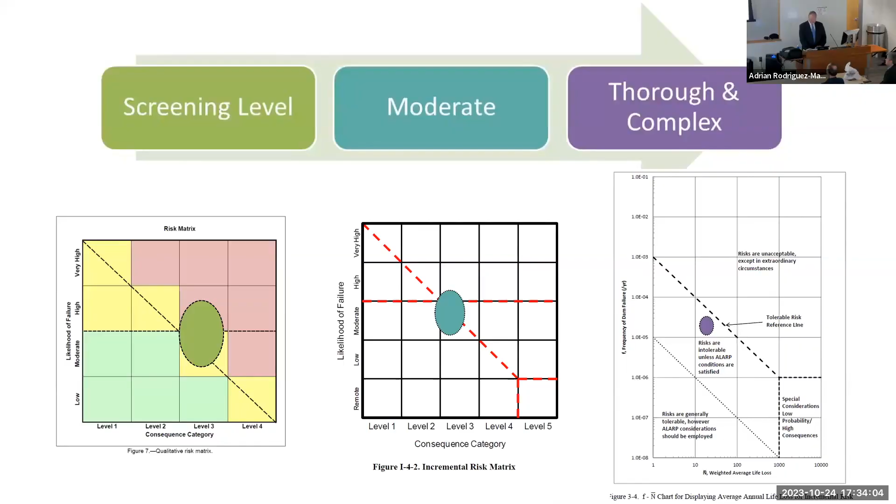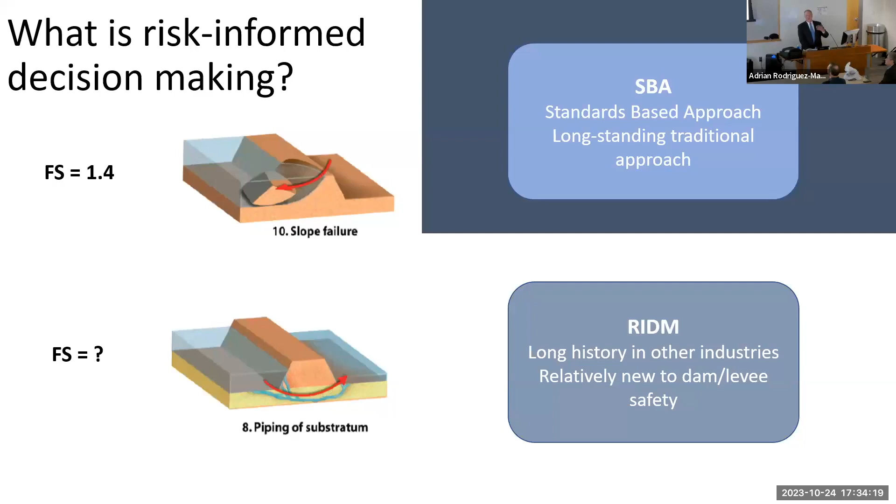So again, in combination with standards based typical factors of safety and strength of materials, we're able to bring into play the failure modes. Are they risky? Are the loading conditions correct? This allows us to make a better informed decision on behalf of the taxpayers and citizens of the country, to invest our tax dollars in the most effective and efficient manner.

So comparing standards based to RIDM, if you can read the table there. Standards based would definitely be more focused on the loading, reaction, strength of materials, stability, those kinds of evaluations. Same applies under RIDM, but we look at a wider range of loadings, and we truly do assess and try to put probabilities to those events in order to rack and stack and determine which has the highest risk and which should be worked on first.

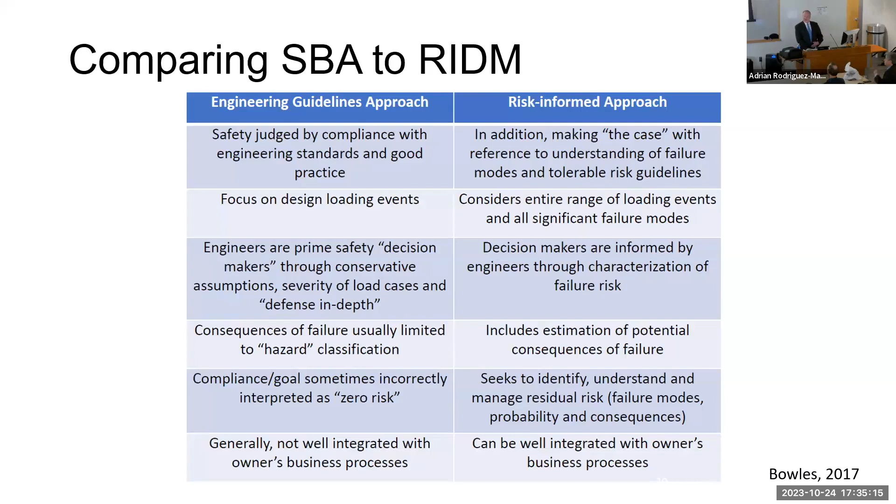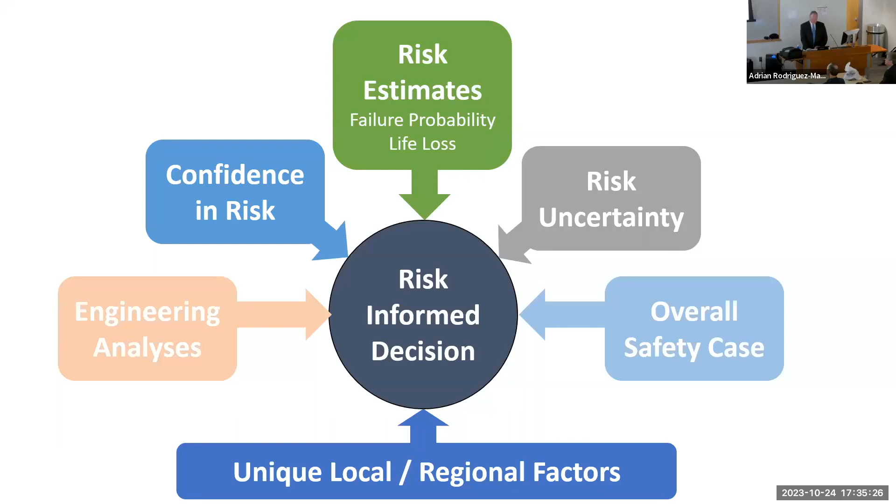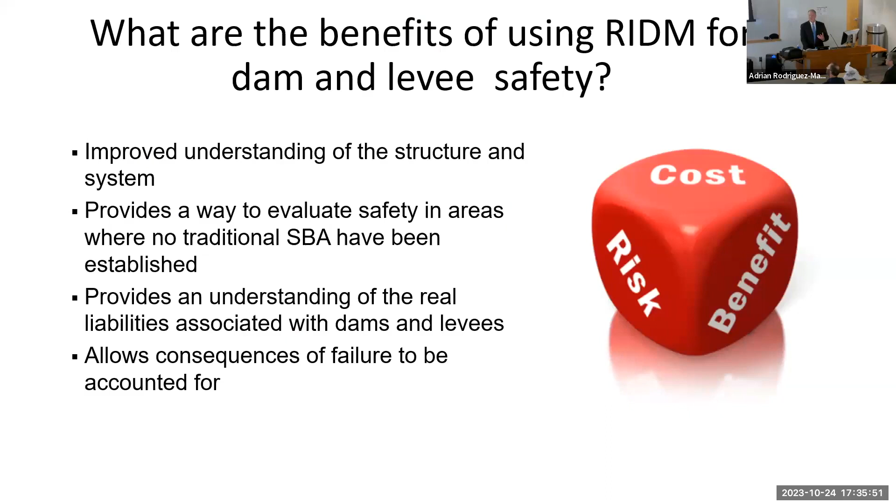Again, these are all the components associated with utilizing RIDM. Over the last 20 plus years, where it's been used in a detailed way as part of the organization's operation of their infrastructure, it's definitely improved our understanding of that structure and its pieces, and enabled better decisions financially and from an engineering perspective.

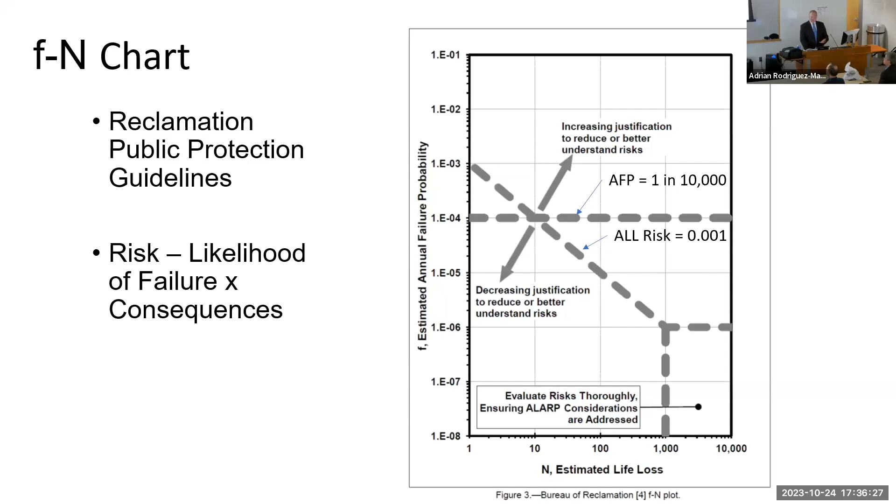So these again summarize the elements of dam safety risk management. You have the risk assessment and then trying to make decisions, typically displayed in an FN chart - probability of failure versus loss of life. The line there represents those summary probabilities that plot above result in action; they're higher risk, and those below would be lower. So the goal is, with the expenditure of money and implementing engineering solutions, to reduce that risk and get your failure modes to plot below the line. You'll hear that term quite frequently.

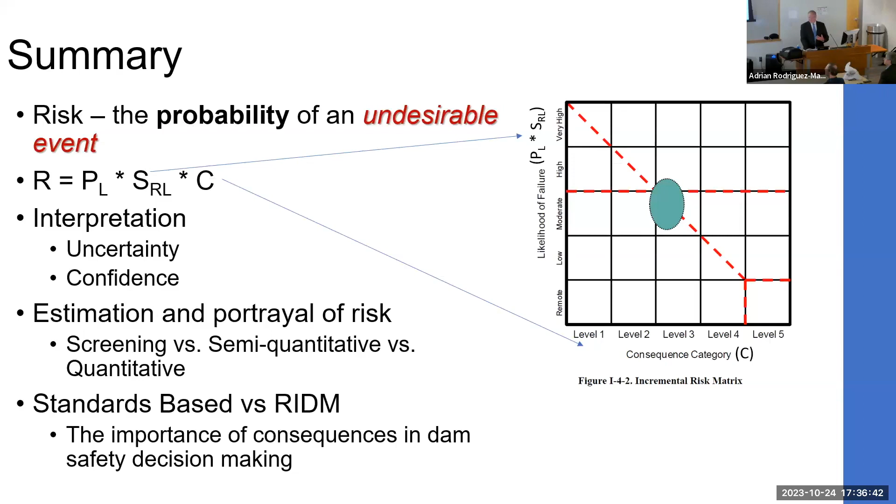So just some final thoughts. Unfortunately, I think in our country, particularly in my lifetime professional career, we seem to struggle to develop a long-term vision, or a long-term policy. We unfortunately react to catastrophic events. Teton was a catastrophic event that resulted in the dam safety legislation, which forced federal agencies to start taking a more robust evaluation of their infrastructure.

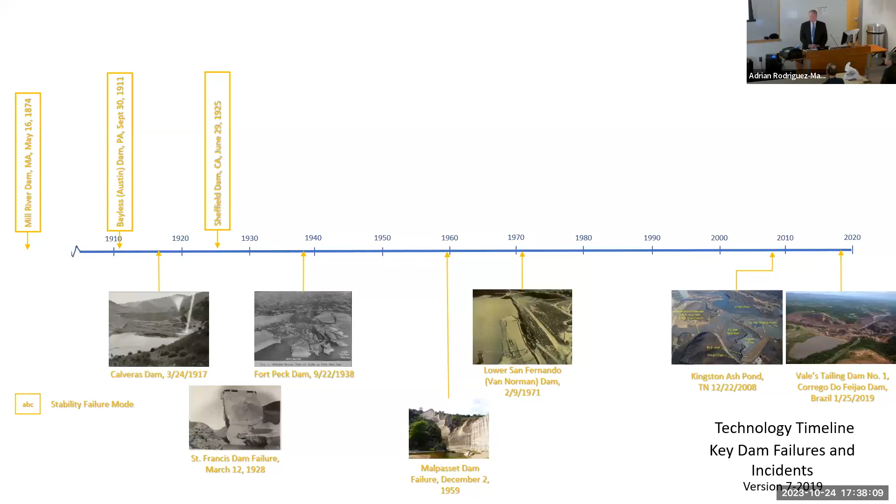Katrina caused the Corps to look at levees, flood walls, and coastal protection. So unfortunately, I think we react to catastrophic events as a country and as a nation. And I think as you go forward in your continued education, as you move into the workforce and become part of our profession, hopefully you'll leave a lasting impression and be able to advance policy and advance our profession to a point where we do less reaction and maybe look forward and try to do more planning.

Again, a tremendous amount of damage is done by hurricanes or by dam failures, levee failures, and we all need to be cognizant of that as we continue our education and move in to help everybody associated with maintaining what we have built and what our forefathers have built.

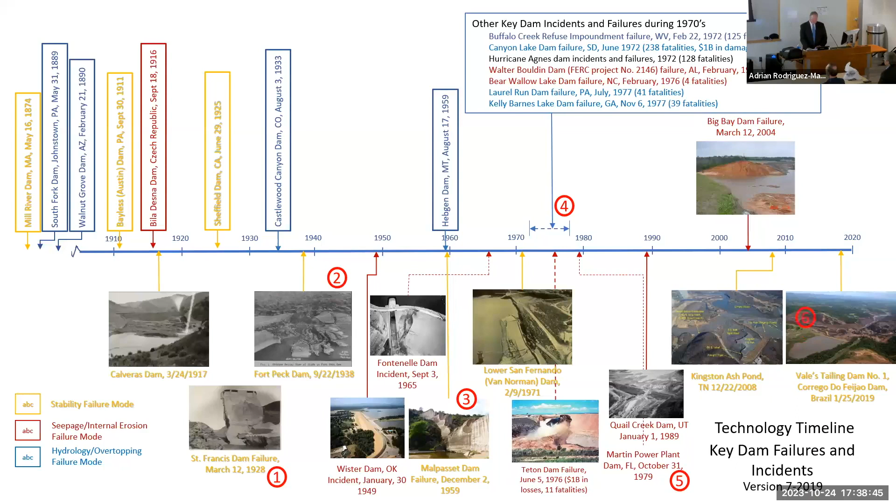Some summary statistics of civil works value to the nation. For every $1 spent by the government on flood risk management, it's prevented nearly $8 return in flood damages, reduction of that. Again, over the last 100 years, this country has built some of the world's most robust, complicated infrastructure that we've all benefited from.

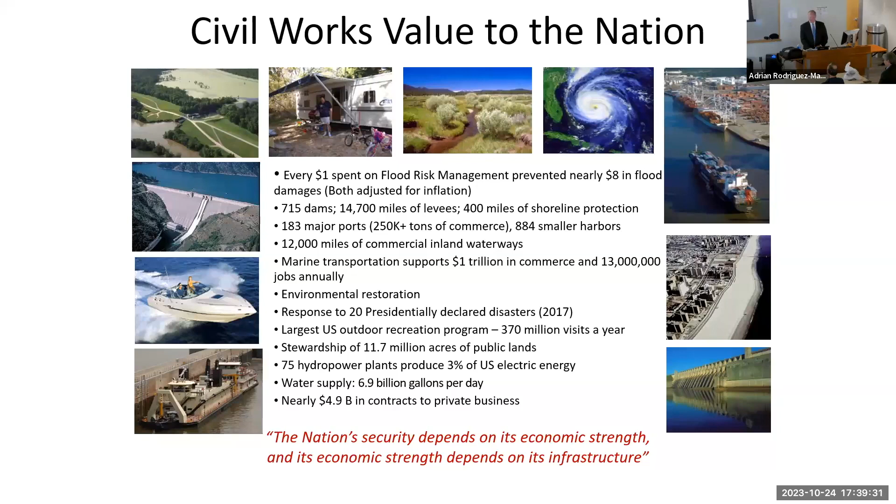And certainly as you go forward, I think you all have that responsibility, if you will, to take that on in maintaining it.

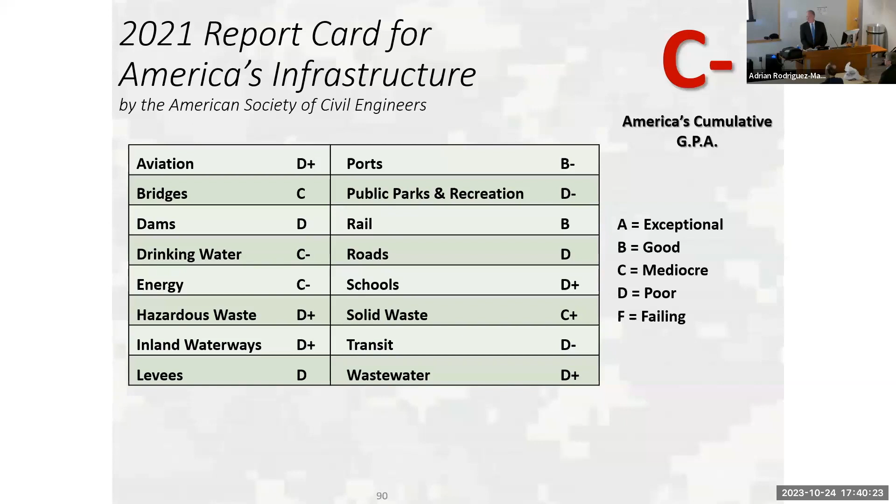ASCE puts out their report card, as you can see, for 2021 for the various categories. We're not doing the greatest. So again, as Alan said at the beginning, become involved in these professional societies and organizations. We are the profession's mouthpiece to our legislatures and to Congress, enabling us to increase our funding and make infrastructure a priority. This administration has been able to pass the infrastructure bill, which has secured funding, and that's certainly a step in the right direction. But as you can see by our report card, we still have a long ways to go to get up to acceptable marks, I think.